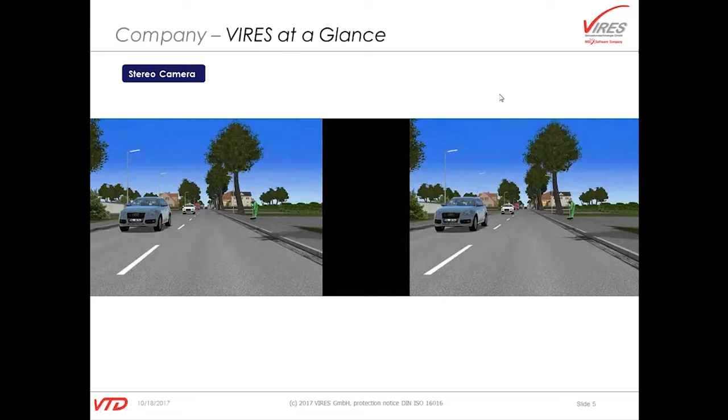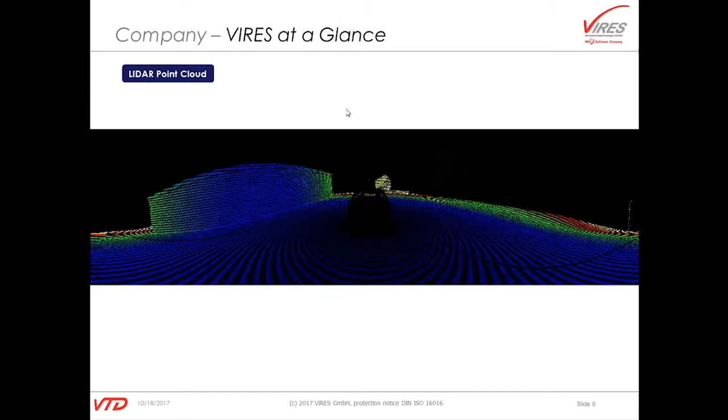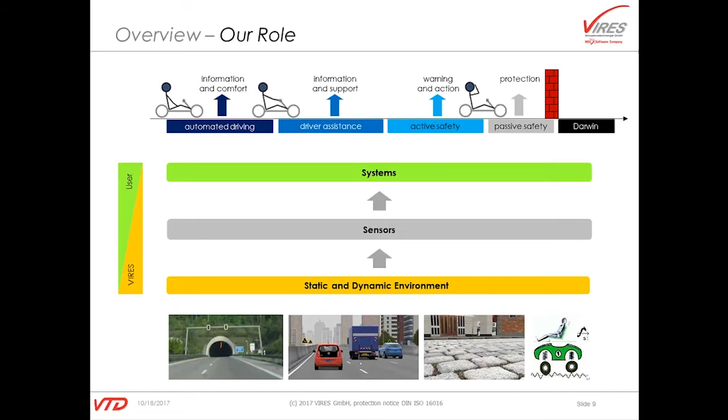An overview of what we do, and I have already mentioned the keywords, is shown in this picture here. I will not stick too long to this one, but I just want to show you that our primary concern is providing the virtual environment, which means we create the static environment with our tools, even to microscopic level, like you see here in this cobblestone pattern, or for highly complex road networks.

We save this data in a 3D model, which is used for the graphics and for the sensors, and we save the data in a logical description, the so-called OpenDRIVE again, and OpenCRG, to provide a base layer to define the dynamic behavior of participants within the networks. And the resulting format for the description of how these participants behave is the OpenSCENARIO format where we store our scenario information.

Once this is done, once the 3D environment has been created, we go to the animation stage. We can provide traffic animation. We can provide vehicle animation, dedicated vehicles, and we can provide, of course, among other, road contact information and several other features. When the environment is running, all we have to take care of is, of course, to manage the whole operation of the tool chain, of a test, of a scenario, of running a scenario. So we have the tools for operating our software itself.

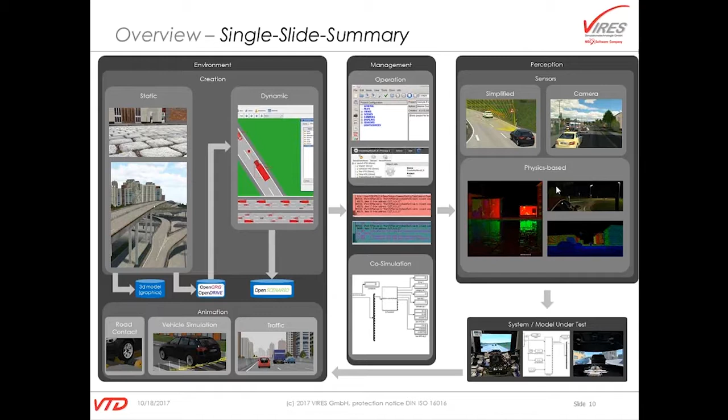You may wonder why VIRES is now talking at a webinar of MSC. The company VIRES has been acquired by MSC at the beginning of this year, and we identified a couple of fields where we can basically have synergies between what MSC has been providing and will be providing and what we are doing. Just for you who are familiar with the MSC toolchain, I just want to mention where MSC will blend into what we are doing.

For the animation of the vehicle, for example, we will be offering as an option in the future that you may use MSC Adams or MSC Adams Realtime for the simulation. We will be working together with MSC on defining scenario libraries. For the management of the simulations, we are working currently on the link with MSC's Sim Manager software that you may know already, and we are also working together with MSC colleagues in California on the scenario management.

Very important, especially if you're looking at the development of automated systems, is the following part that we are doing. We are working with the MSC colleagues in California on providing machine learning features. There will be a few slides about this later on. Basically, they are shown here by these three fields, which is that we are working together with MSC on active AI, an active AI gym, on an AI driver, and AI verification tools.

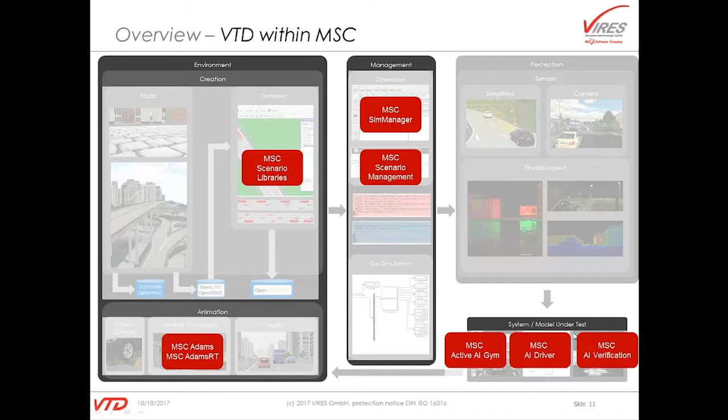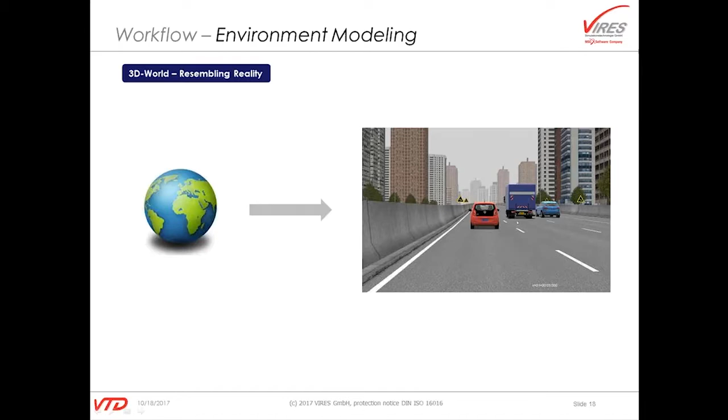Okay, let's look into the 3D scene definition. The art of doing a 3D scene definition for the virtual environment is to make something that resembles the real world. And there's a couple of means how this can be achieved. Depending on what you want to see in your simulation, we are using the terms of soft reality and hard reality.

For us, hard reality means that you try to resemble something that is really there in the world out there. So this means you're using actual scans of data, of environments. You're using actual map data like OpenStreetMap, videos and other data that you may have, and you try to convert this into something that you can use for the traffic in terms of a logical description of a road network or a road environment, and into something that you can use for the physics or for the sensors, where you create a 3D geometry and material descriptions.

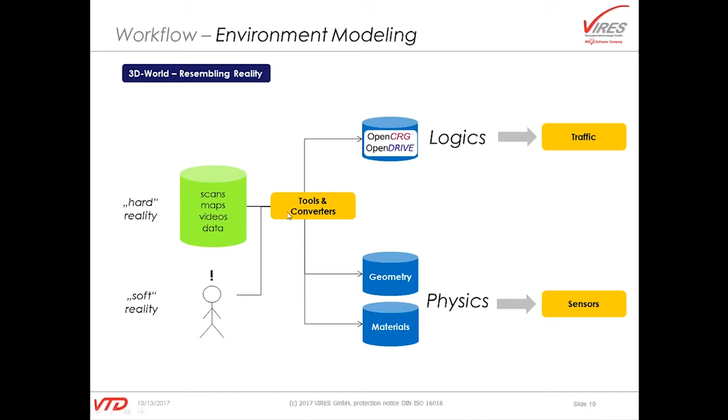As I said, this may either resemble the 3D environment that is really out there, or depending on what you want to test, you can also go with pure virtual environments, which means you would not find a certain stretch of road that you are testing on in the real world, but you might want to execute a certain test. So we have an editor where you can create your road networks from scratch and provide an environment for specific tests.

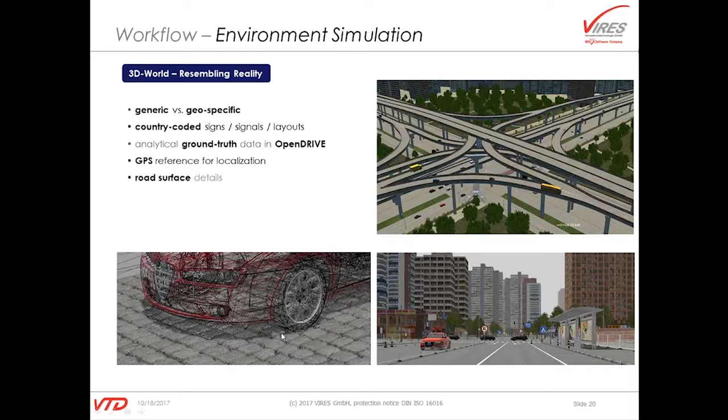And on the left side, you see that we can go to the microscopic levels where you will have things like cobblestone in a 5mm grid, for example. So we can get, either from measurements or from synthetic data, the road surfaces into the simulation. This was the 3D scene, the static part. If we look at the dynamic content, it's a little bit more difficult to show it in a nice slide. I tried to depict it here in this one.

Actually, there's always a couple of sources for how you define the actions that have to be performed by entities within your virtual environment. As I said before, we store all of this information in the so-called OpenSCENARIO format. And the question is, how do you get to this format? One way, of course, is that you edit scenes with our editor, which I will show a little bit later on. So you can populate a road network with players, and you can assign actions to these players. This is one way.

Another way, which comes now more from the research projects we are working on, is to use something like rules to define scenario descriptions. Then you would have something like a generator in between, which could be a piece of software written either by you or by us. And we also find now what's called replay to simulation. We often find that people have their own test logs from actual test rides and want to see this information in the simulation. This is where we take an analyzer, for example, which takes all the CAN messages recorded on a vehicle and generates from this the dynamic behavior of entities within a 3D environment.

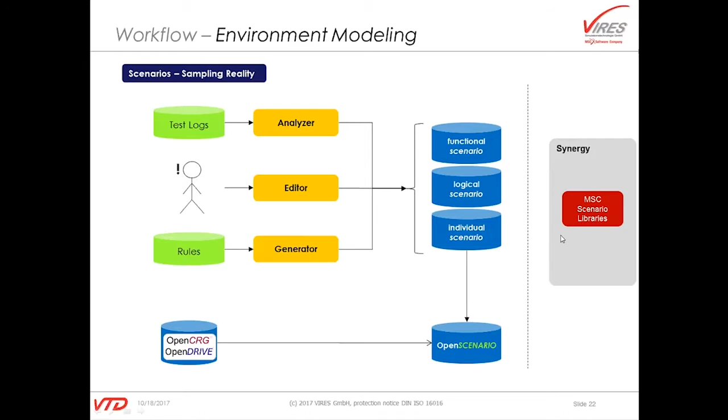This is just a brief look at our editor, which can be used for editing or populating the 3D environment with entities. It's a little bit hard to see. You will see some small bubbles here, which provide triggers for actions. You will see this larger circle, which defines a traffic swarm area, so we can have random traffic around our own vehicle. All of our players are then being controlled by random behavior here.

On the left side, you see that you can define your traffic light control programs here with the timing. So we can not only control our own vehicles, we can also control, of course, infrastructure elements.

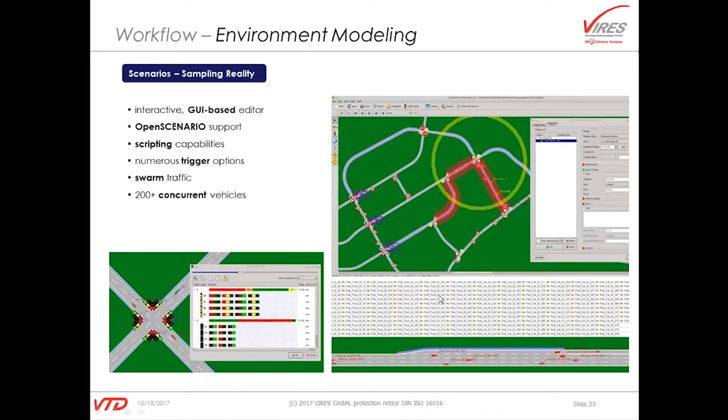On the bottom, you see that we can create a quite high number of vehicles in our traffic simulation and in our virtual environment. This is an excerpt from a scenario where we were simulating a highway merge, and we were having something like 400 vehicles running in real time in this environment.

The animation part is the part that actually consumes the OpenSCENARIO description and makes reference to the OpenDRIVE file. As I said before, we typically call it the traffic simulation part. This will animate the whole 3D environment.

There will be a couple of instances created inside the traffic simulation, like the traffic running around in the simulation. But of course, you may feed in your own vehicle from whatever sources you have, using your own vehicle dynamics, or, pointing again to a synergy with MSC, using MSC Adams or MSC Adams real-time controlled vehicles. And there may be live data being fed in, or different macroscopic traffic flow simulation entities that may be coming in.

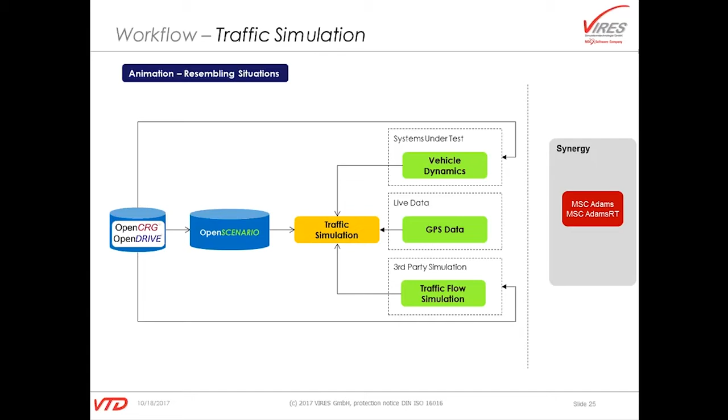It's the traffic simulation itself. In our case, it means that we have individual vehicles. Each vehicle is being controlled by an AI driver that we have. So we have entities operating independently, which per default are called autonomous drivers in our case. And these will take care not to crash into each other, follow the traffic rules, do a routing within the traffic network, etc.

Each entity is represented by a 3D model. So this may be a vehicle, or, as you see here, a horse and some other people. So this may be animals, people, and vehicles, of course. Looking at the vehicles, each entity may be controlled by whatever vehicle dynamics you like. Per default we have our own VTD internal vehicle dynamics. You may use MSC Adams, Adams real-time vehicle dynamics, or your custom vehicle dynamics to do the calculation of the dynamic behavior of the vehicle.

And for the input side, there is always a controller attached to a vehicle. This may be either your highly automated driving or ADAS function. Depending on what kind of function it is, it may control both lateral and longitudinal axis or just one of these axes. The remaining axis may always be controlled by one of the other controllers. A typical use case for a driver-in-the-loop simulator is a human driver doing the lateral control, and an ACC, or adaptive cruise control, doing the longitudinal control.

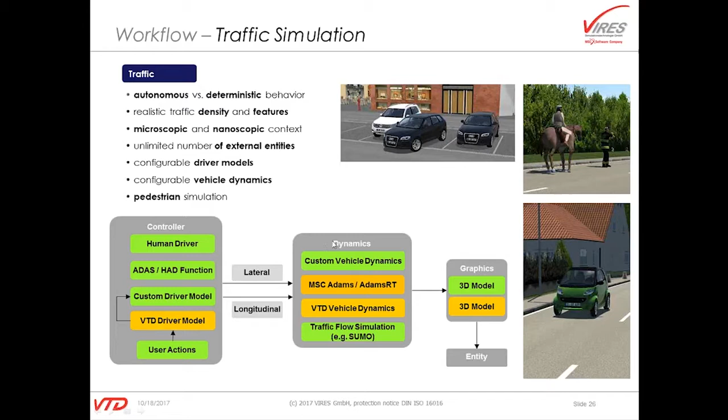And all of this may also be controlled with our VTD driver model. So there are quite a few combinations of how you can run the whole software. And you can do this per vehicle in the simulation, and you can do a couple hundred vehicles in the simulation. So you see the scalability there.

Just for Adams real-time, this is an animation given to me by my Adams colleagues. Adams real-time means that you can have a highly accurate vehicle dynamics model. Adams is one of the most widely used vehicle dynamics simulation tool suites in the industry, and it is proven to provide validated results when you compare it to reality.

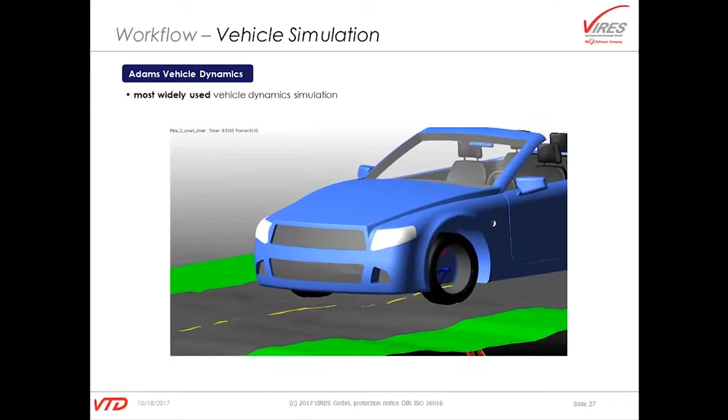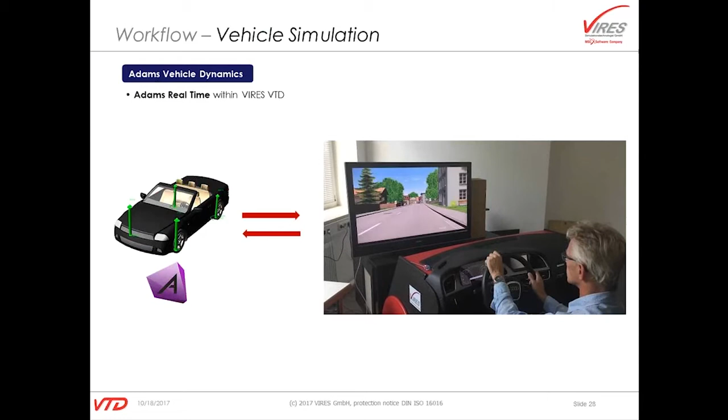Another case showing our synergies with Adams and with MSC. You see one of our colleagues from MSC driving our simplified mock-up using Adams real-time vehicle dynamics in our VTD environment. So the synergies are not just envisaged, they are already in place.

Going further, not going back. I'm going forward to the means to visualize and actually make a perception of what we do in the 3D environment. I will look into this from this side. Before, I told you about the traffic simulation that is based on the road network, and we have the behavior of the dynamic participants described in OpenSCENARIO.

So we will get the position of each participant in the 3D environment from the traffic simulation. Remember, your own vehicle may be fed in here, so your own vehicle will also at least be channeled through this traffic simulation. On one of the previous slides, I said that the 3D environment is represented by the geometry and materials, together defining the physics of the 3D environment.

And once we have the position of everyone and we know how the physics are, we can place sensors in the world. They may be at fixed locations, on any number of vehicles, etc. And these sensors will then provide you with the data that will typically run into either a driver model of yours or your highly automated driving functions.

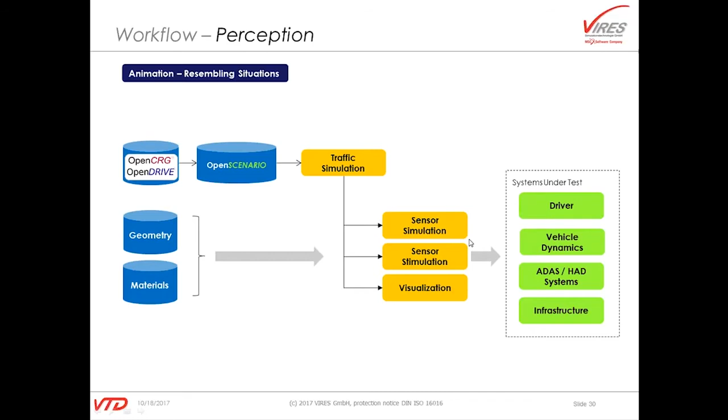The perception, as I've shown before, is split into the visualization and the sensor simulation and stimulation. For the visualization part, well, it's not visualization itself, it's a camera sensor. So I could have put it into the sensor itself, but usually it's treated a little bit different.

We can provide the images from the image generator either in the classic way by putting them on a monitor, and you can look at it as a human or using a camera, or, which is more sophisticated, especially if you look into the hardware-in-the-loop test benches, we will provide you the images directly from the shared memory of our image generator, and you can then tweak them or do a tone mapping or whatever, and then either feed them into your system under test or wherever you want to store these images. So there's a couple of means how you can generate and consume the images. Again, this would be a separate webinar showing all of these features.

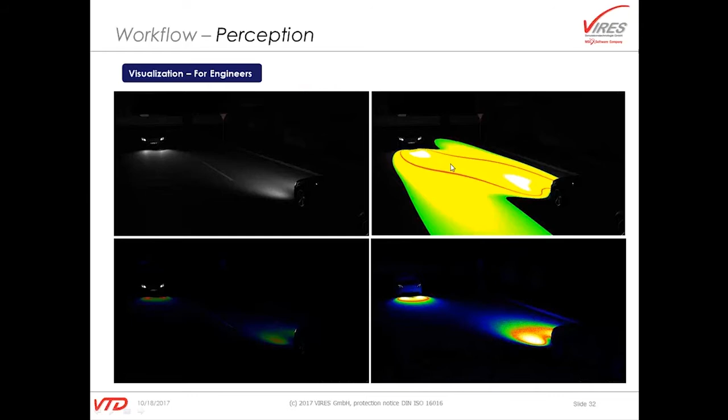This is just another example of what our image generator is also being used for. It's currently being used in quite a couple of installations for headlight simulation, high-quality headlight simulation, like resembling matrix beams and other sophisticated headlight systems. So this is one more way to use the image generator. The typical way would be this one. You would be looking into a 3D environment from whatever perspective.

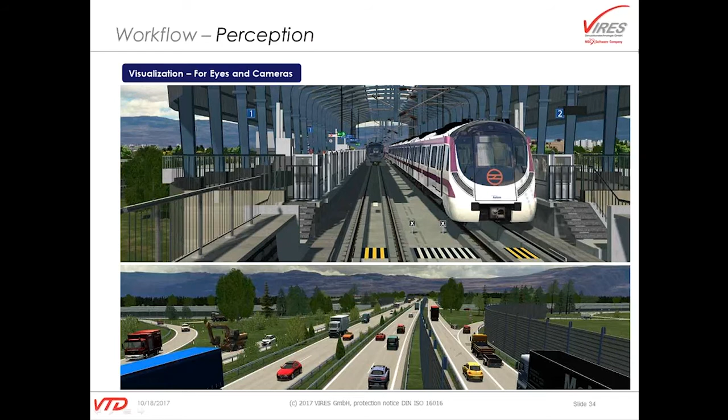Yet another picture just to show that we are not only working in the automotive, but also in the railroad business. In the bottom picture, you see a highway scenario with a large number of vehicles. And that's basically the camera side.

Now we go into the sensor simulation and stimulation side of the tool chain. Whether it's sensor simulation or stimulation always depends a little bit on what your ADAS or highly automated driving system looks like. If, for example, we are feeding camera data or image data into a hardware camera, then it's a sensor stimulation. If we just provide data for an image processor in software, then it's more like sensor simulation. But it's always somewhere in between.

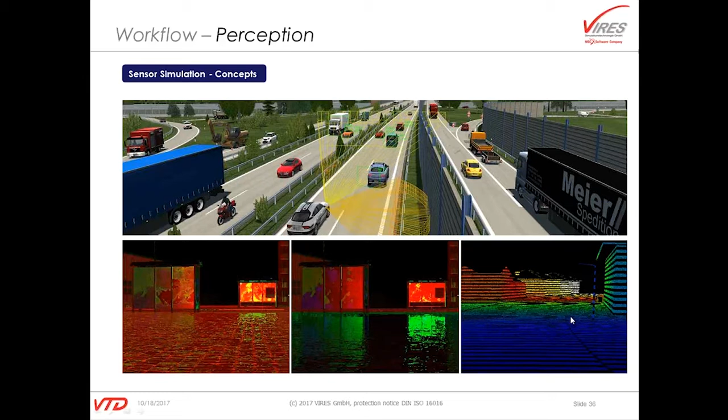On the right side, you see again, it's a snapshot from the previous video, that we can also provide LiDAR information in typical point cloud format. Yet another way to use the software, if you're looking at the sensors, is of course if you are developing your own image processing algorithms, like what you see here on the right side.

The good thing is if we do the simulation in the virtual domain, of course we all know where all objects are, so we can provide you with semantically annotated or segmented pictures, so you have like a ground truth for your image processing, and you can also have information like bounding boxes, etc.

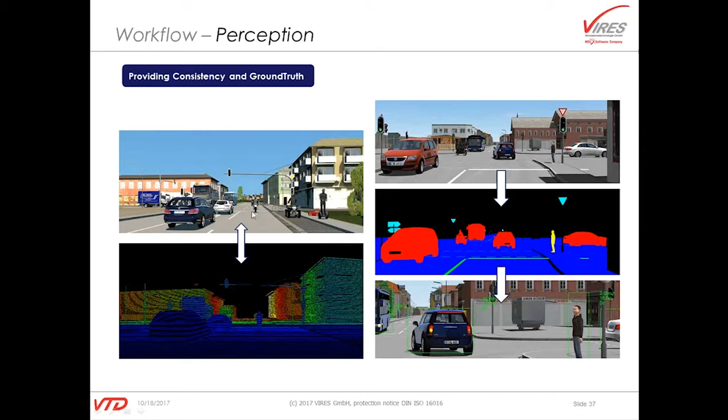And the left side again shows that of course we can provide more or less consistent information. I say less because these two pictures here on the left side, they are not from the same simulation run, and you see on the bottom there is this Segway, for example, missing. But this shows you that we can run also concurrently different sensor models and provide you with concurrent and consistent information at the same time for your simulation environment.

A couple more slides about what we are doing in terms of the synergy with our colleagues with MSC in California. So you've seen all the stuff that we can do with our software, with the virtual test drive. We can generate the sensor information, etc. And now the question is, what's an application for this?

And of course, classically, our users have done all of these applications, but we are now in the very good position that we have colleagues who are also working on some very interesting applications for the virtual testing, which are in this case for machine learning, for the highly automated driving. And so this gives us just enough leverage to develop our software together with our colleagues and make it ready to fit the needs of our prospective users in these fields.

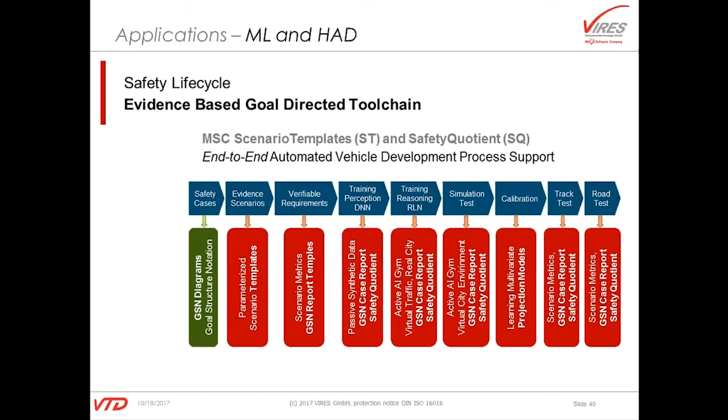And we as VIRES are providing the virtual environment for creating this large number of test data that is required for training driver models, for example, AI driver models. Again, all these environments will count later on. It means that there will be data coming from road tests, there will be data coming from track tests, and the largest number of data will be coming from the scenarios.

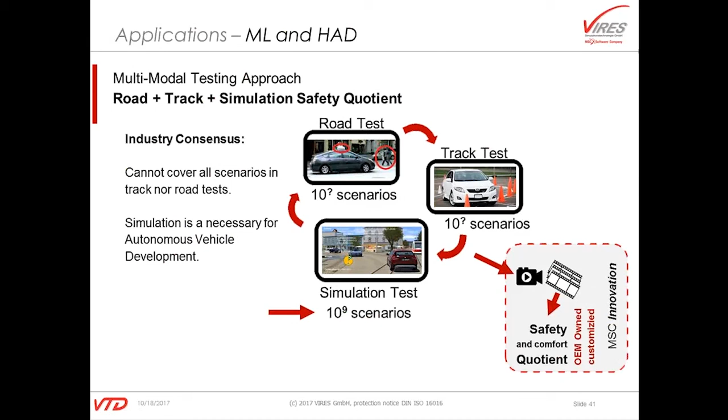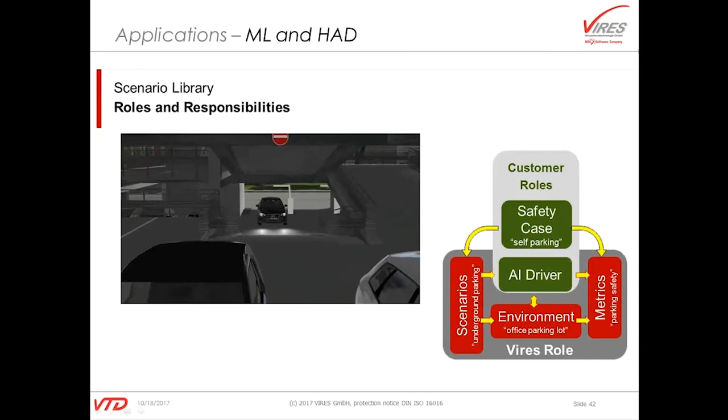So usually the customer would first define the test case that has to be done, like self-parking in this example here in the video, and will of course train his driver or even adapt a driver model that is being done by our colleagues in California. The metrics will typically be done by our colleagues in California. The environment, that is what VIRES will be doing.

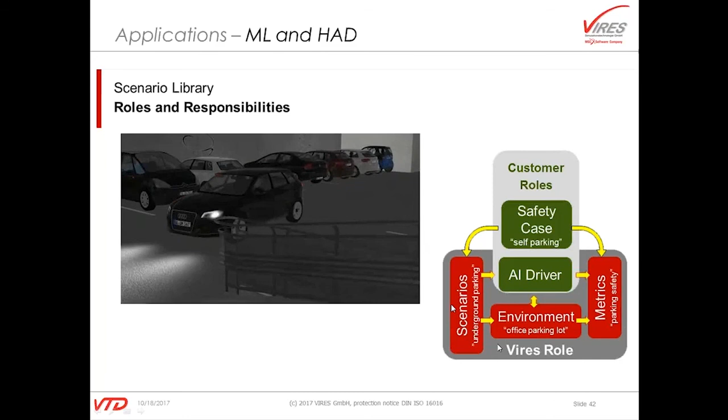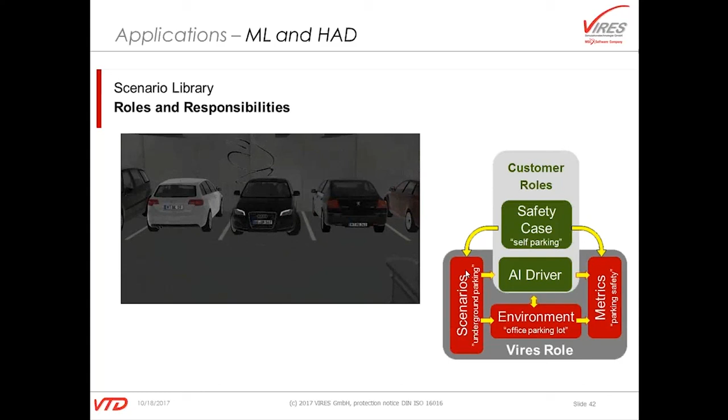So we will be defining the 3D environment, and together with our colleagues in California, we will be defining the scenario templates and, let's say, the space of scenarios that has to be covered for proper testing and making sure that you achieve the reliability of the system under development that you were aiming for.

This application that I've shown is just a very, very small extract of what we are all working on currently. But with this application that I've shown, I want to conclude my webinar.